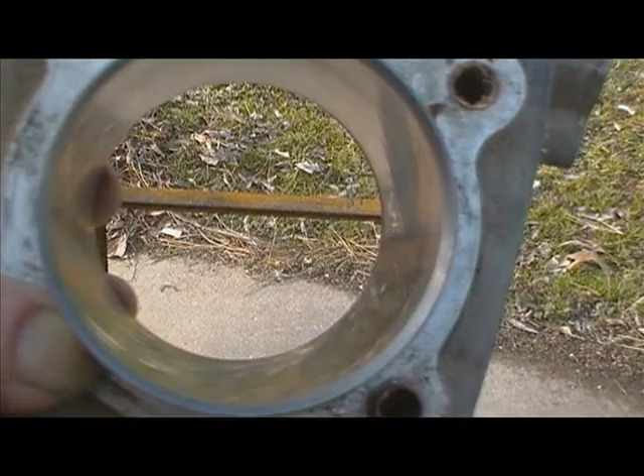I'm going to walk you through some steps. I'm looking at that cylinder, piston, and ring set I was talking about the other day. And I'm going to show you the process of elimination that I'm going to use in discovery on this thing. So bear with me as I work my way through this with you.

First thing we're going to do is go to the eBay site, and I'm going to show you the actual ring set that we got. And then we're going to go to a cycle seller's website that has a breakdown of all those parts and the different identification numbers, and then we're going to call them and verify that what we got is what the website says it is.

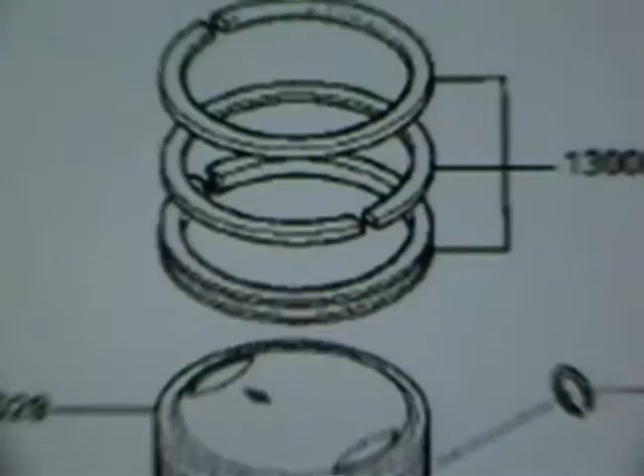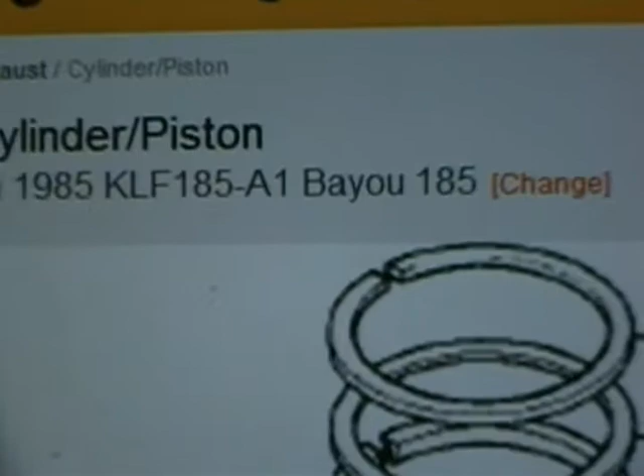There's a website from Cheap Cycle Parts, which I've done some business with them, and they do good. And I looked up the Kawasaki 1985 KLF. I think you can see it right there. 185-A1 Bayou. And this is a description of the rings and the piston and the part number that go with it. Now if you look right here, I'm going to zoom in on that for you.

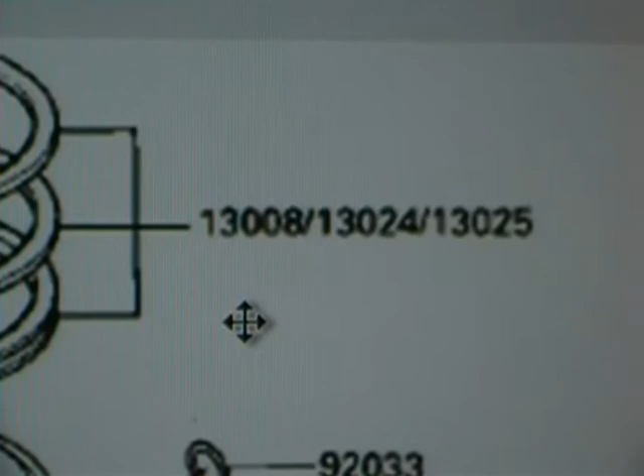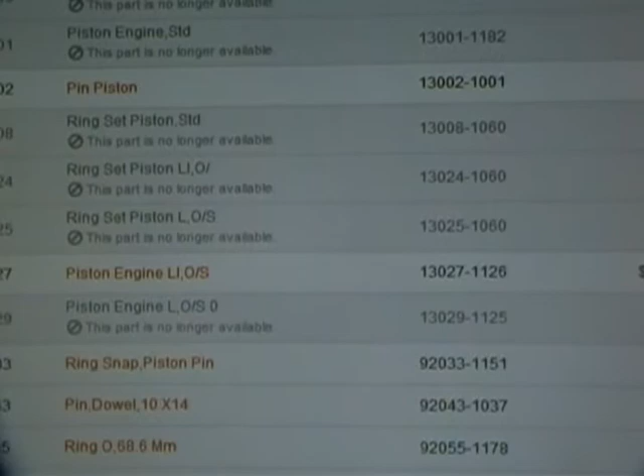It says 13008-13024, which is what those rings were specified as, and dash or slash 13025. Now we pan down the page, and this is a breakdown of all those parts. I'm going to zoom that up a little bit. Hopefully you can see it.

Ring set 13024, and right below it is the 13025, and right above it is 13008. Over here, piston ring set, piston ring set, piston ring set. All of these are not available.

Now that first one says STD, standard. The second one, which is the one we have, 13024, L1-O/. The one below that, ring set piston L-O/S, which is the 025. We've got the 024 right here.

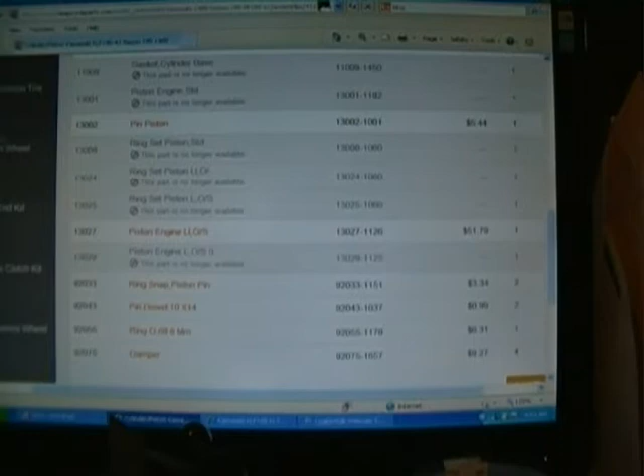So what we're going to do is call them and ask them to verify, if they can, what these stand for, what sizes and dimensions they are, just to see what they say. They've got their phone number up there for customer service at the top of the page. We're going to give them a call. So bear with me while I ring them up. Okay, so we're on hold, waiting in the queue for a representative, and we're just gonna chill out until somebody comes to us.

Okay, you going with the standard piston? Well, actually no. Looking to bore it out a little bit? I'm wanting to know if you can help me confirm what the actual sizes of these would be. That the piston that is available is 1 over standard. Right. It's what that description looks like, but I want to make sure. Right. Because I don't want to tell you one thing and it becomes the other, you know what I mean? Exactly right. I appreciate that. Yeah, no problem.

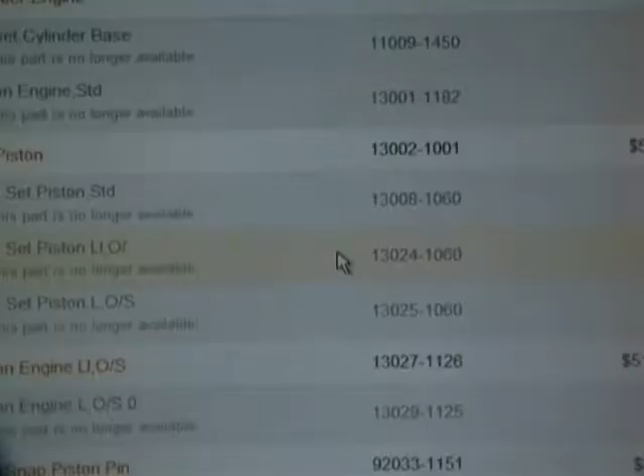Regardless of whether or not this is the right size, that's the only one I'm going to be able to offer. Okay. That's not saying that you won't be able to find it somewhere else, but from what I can do, that's going to be the only piston that I'm going to have. Right. What I'm looking at, we matched the part number of those rings, and it's an L1-O slash. Right. So what I'm looking at is this piston size is matching the ring size. Well, the description at least.

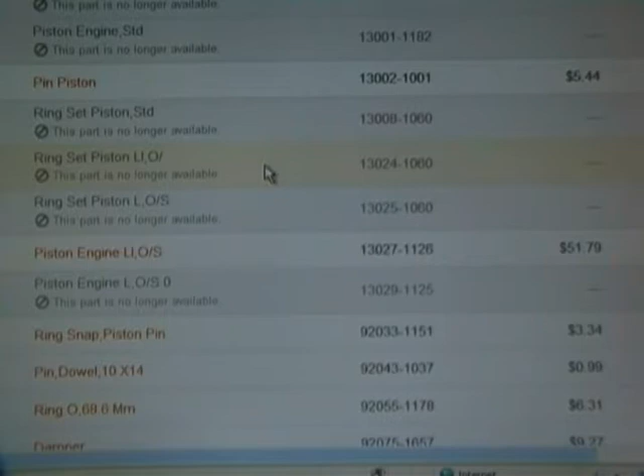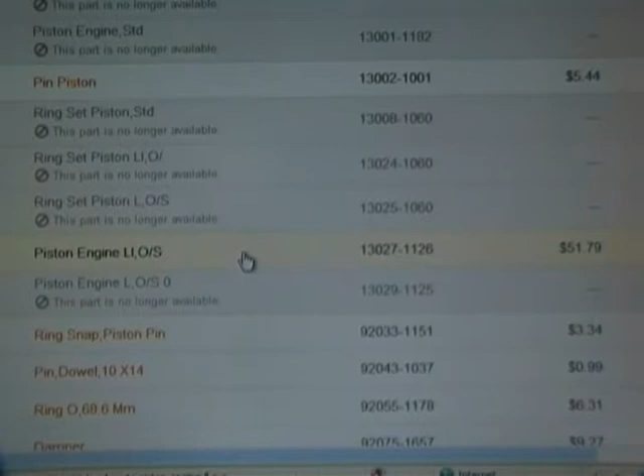The L1O dash. And I think that's going to be as far as I can go description-wise. It's just that size, and what I'm reading is this is a piston or an engine piston, 1 over standard is what that description is telling me. Okay. So,

Oh crap, I hung up on the guy. Alright, so now I feel like a doofus because I accidentally hung up on the guy.

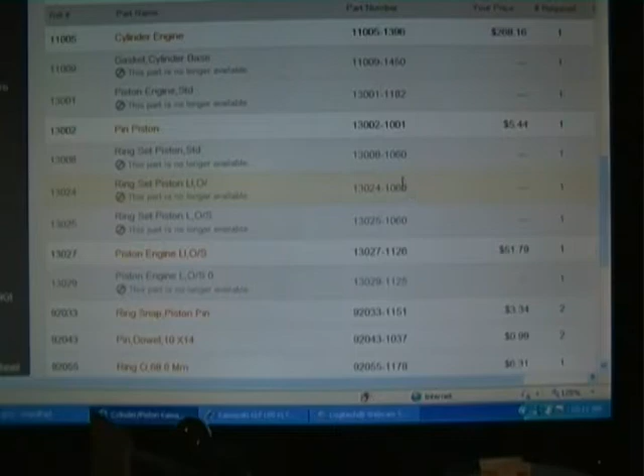Okay. The one piston that you have available is going to match the rings that I have. That's my best educated opinion, or guess. I ran this before, where we were looking for a size, and we couldn't go Kawasaki because we couldn't verify. But what I'm seeing is that L1 OS is going to fit the L1O.

And the reason it's really throwing me off is that ring set that you have, it's on the website and on my other program that I was looking at, it's still the O dash, and it should be O-S. It's a weird part description. Yeah, it is. Really what's throwing me through a loop right now. Yeah. But I'm thinking what happened was they just missed that keystroke and missed the S. Yeah, okay. So that L1 OS is my best educated guess as to what piston is going to fit those rings. Okay.

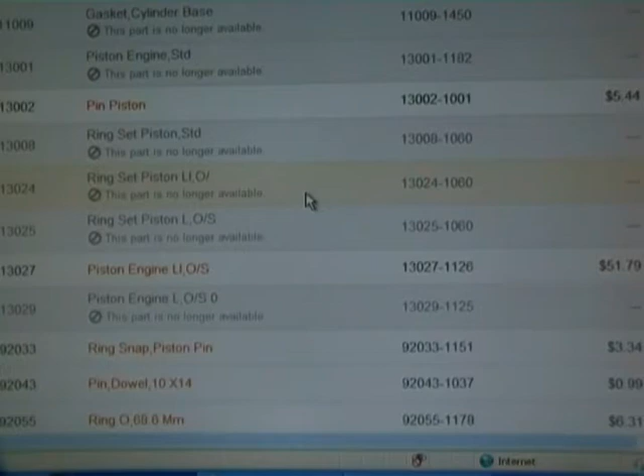Alright, thank you, man. Yeah, no problem. I appreciate your time. Oh, no problem. And feel free to call back and ask for me, and I'll help you out any day, okay? That's great. Thank you, Jonathan. All right. Have a great day, man. You too.

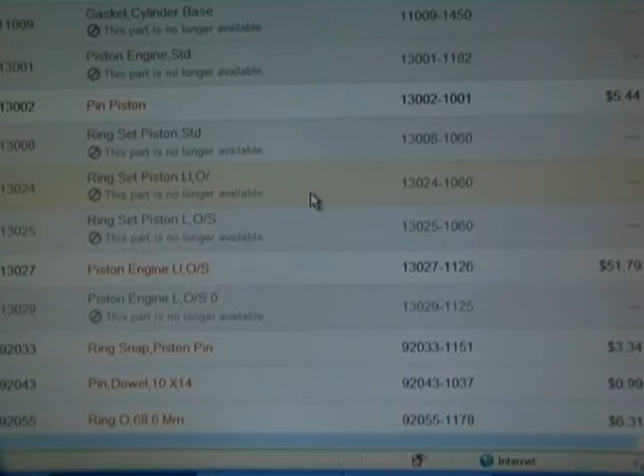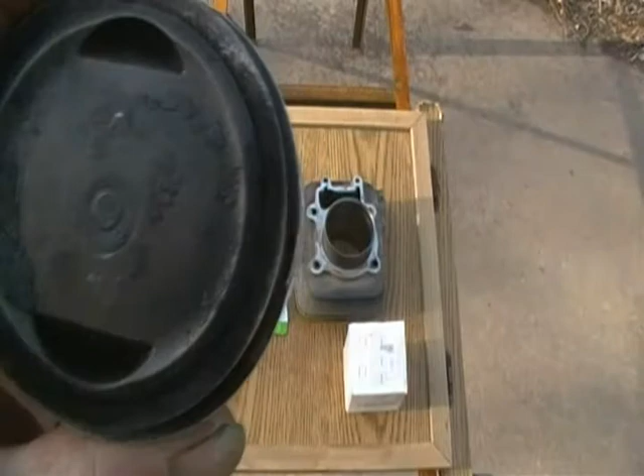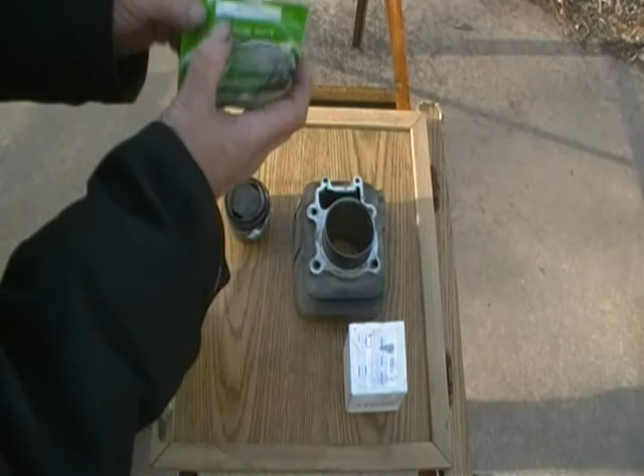So we're going to go out and actually measure this stuff and see what it looks like. Alright? Okay, guys. There you can see it says 100 on the top of this piston. And we already know that this is 67 millimeter because I've measured it 100 times before in my previous videos. So what we're going to do is take out one of these rings, and it's cold out here, so I got to be careful I don't snap one of these.

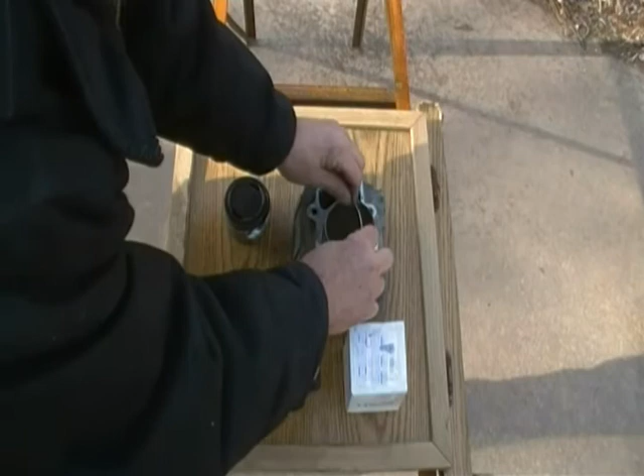We're going to set it down in there and push it down in with the piston. Make sure it's level. And there's the gap, which you can barely see. I'm going to pause you for a second while I get a feeler gauge. We're going to measure that gap, and then we're going to check the book and see what it should be. Okay.

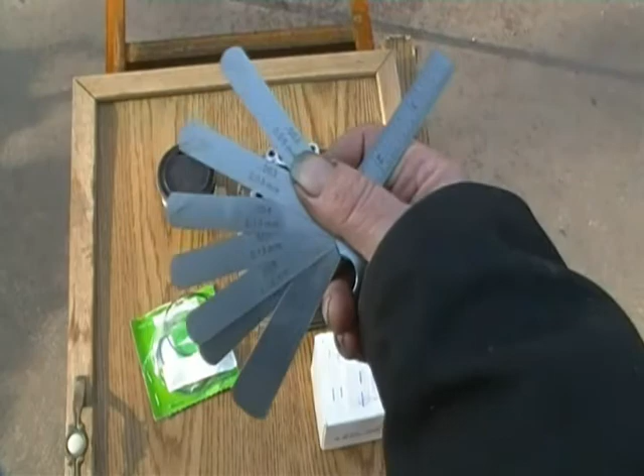Look at these little beauties. It's a brand new set of feeler gauges. I bought them a while back because my other stuff was so rusty I couldn't read them. Anyway, I've got a 2, 3, 4, and 5 here. And I'm trying to zoom back in. I know it's fuzzy, but you get the idea. This is number 2, 11.

Here's a 12. 13. 14. Starting to feel a little something there. Looks like we skip a 15, go to 16. I actually feel a little something with the 16. Let's try 18, see what happens. Okay, 18 won't go in there. So I'd say it's probably 17. 16 or 17 thousandths, or 0.40 millimeter. 16 thousandths. Alright, keep that number in my mind, and in your mind too, because the book's still in the house.

Alright, so the old thermometer on the wall in the shop here says it's 29 degrees, which is cold to me. I just don't care for it, man. I don't have any heat on, and we did what we need to do, so we're going back in the house and get the book. I left it in there. I forgot it was in there. I thought it was out here. So we're going to go back in there and see what the specs are for the allowable end gap. Remember, 16 thousandths or 0.40 millimeter. Right? Alright, let's go in there and see.